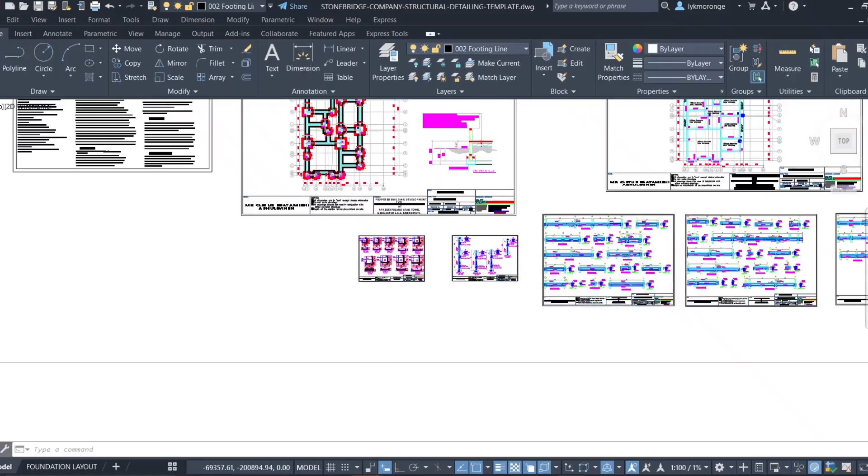Our aim is to edit these pad footings that we brought from ProtaStructure so that they look presentable. You can see how they look like - they are very confused and have a lot of undefined details. So we want to do a good edit so that finally we have our end product as this.

So how do you do this? You first choose one of the columns, like this one. Let me pick this. So you can simply pick this. You can see this one's 1500 by 1500.

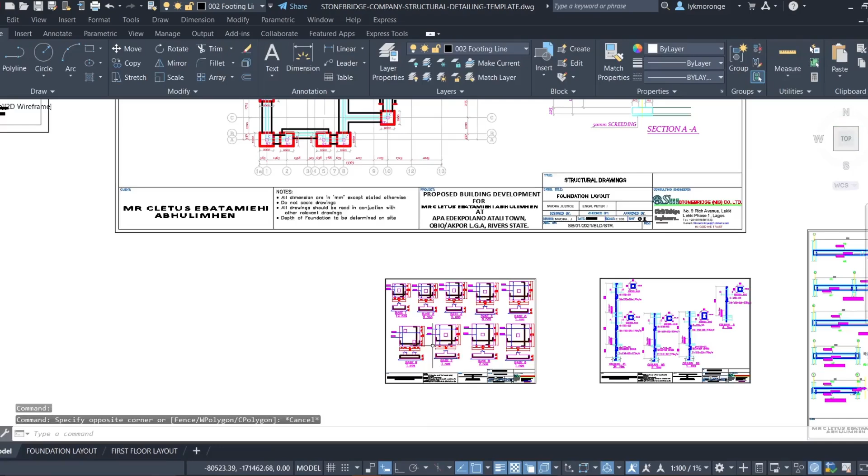Let's just look at what we have. Or alternatively, you can just copy it closer. You can just copy this - copy selected because you want to leave the original here and just move it closer to where we have these pad footings.

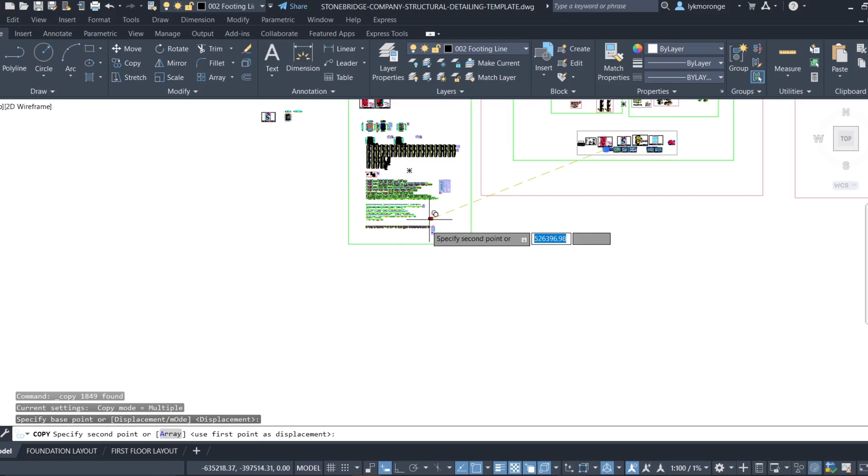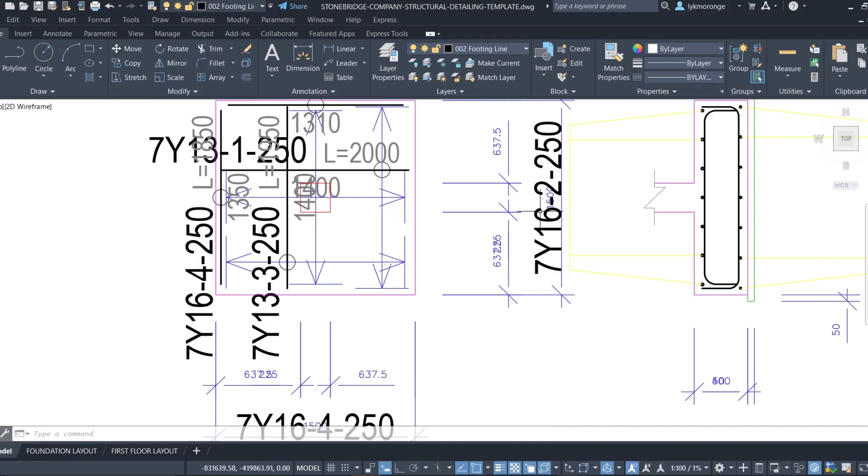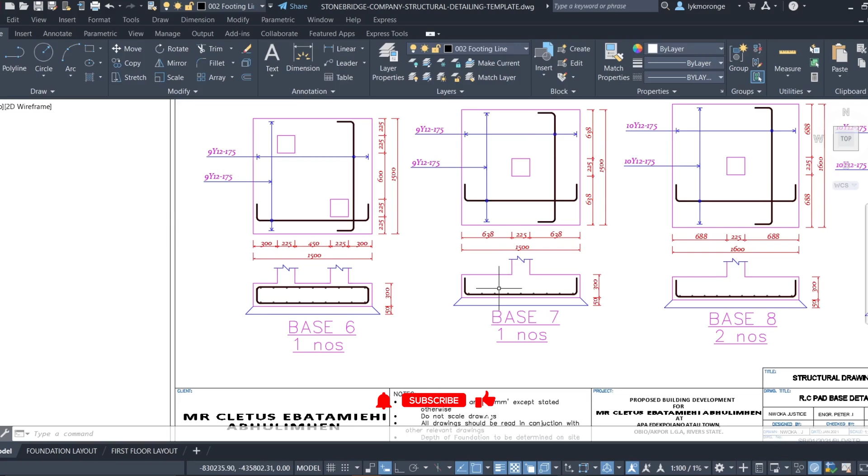So let me copy this one because this is 1500 by 1500, and it has the double reinforcement, but this one doesn't have the double reinforcement. Remember that I taught you why we need this. You can see these two - these are combined pad footings, that's why you can see it has some double reinforcement. Yes, I explained that, so you can just see how these details are up to date with some engineering concepts.

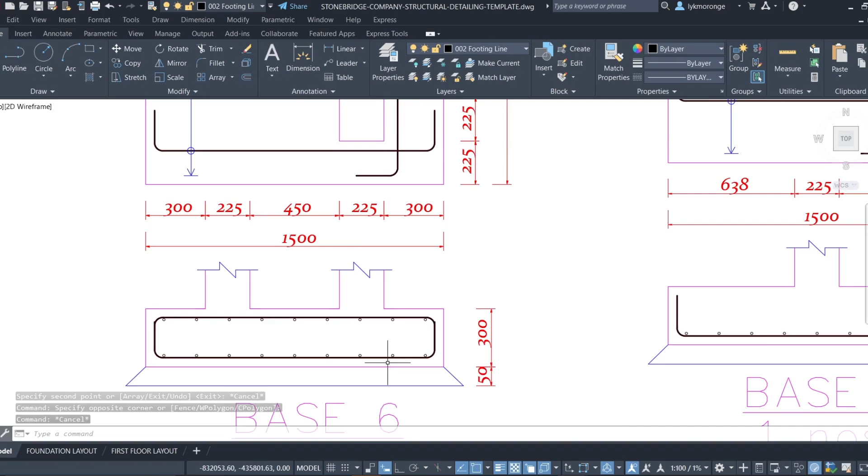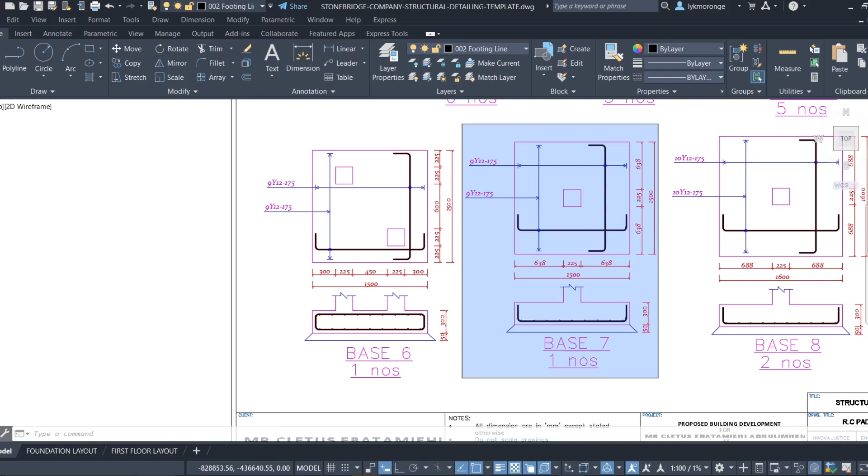So we know that what you have on our end there is not a double reinforced footing, so I'll just pick this one. Let me just copy this and ensure that I don't copy any other. I can just do a right click like this - right click, copy.

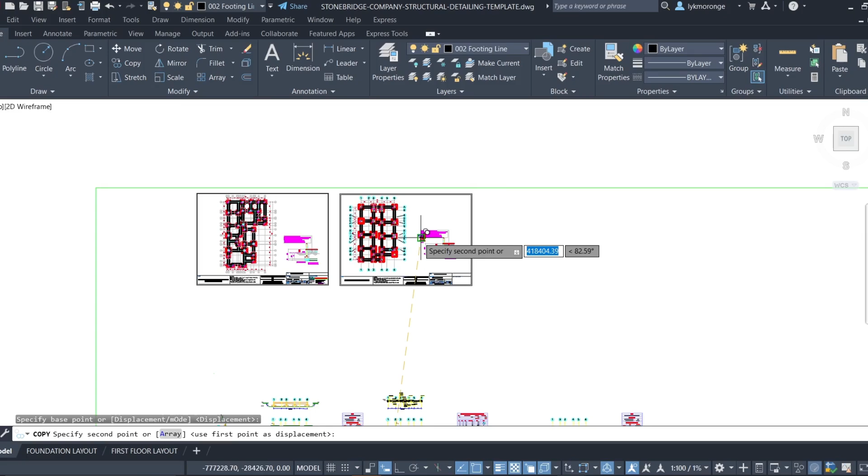So I can move it maybe to where I want to edit all my drawings, where I want to organize my drawing. Remember the other drawing that I was working on is here. So I can simply keep it here. Once I keep it there, you remember that we already finished with this one, so I can actually delete this here.

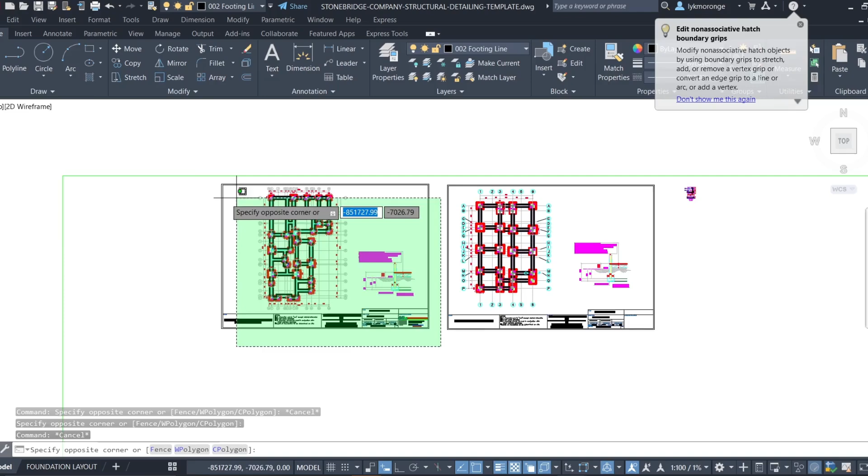Because that is what you are using to edit. Just undo, reselect it again, just delete.

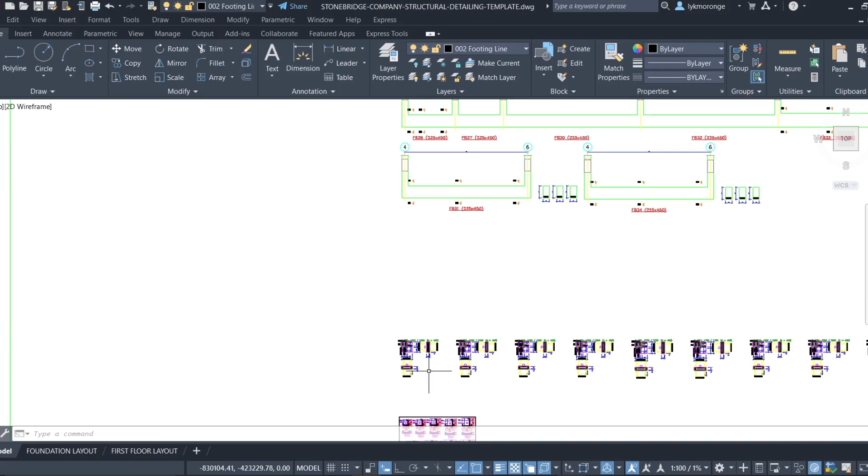And then you simply come and copy this pad footing. Remember, I taught you how you can group these pad footings - if you group them, there will be very few, so you're not going to edit all of these. You only sample - like you have the 1500, so you do those which are under the 1500 category, group them together. So let me pick this and take it closer to this.

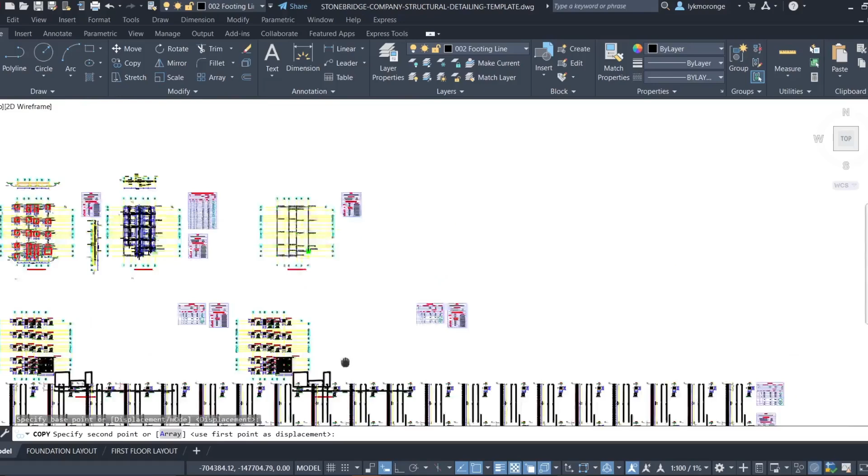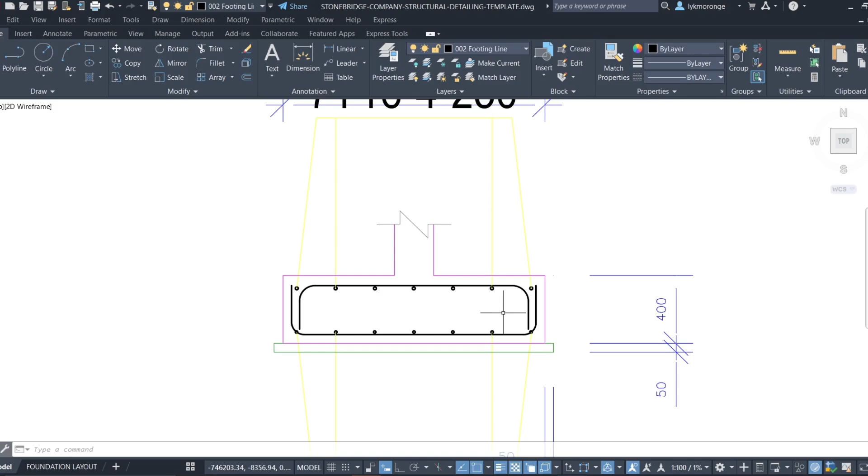So as you can see, there are a number of things that you want to delete that are not necessary. The first one you want to delete - for our case here, we will not need this top reinforcement, so you have to delete it here. And also these labels, we don't need these labels.

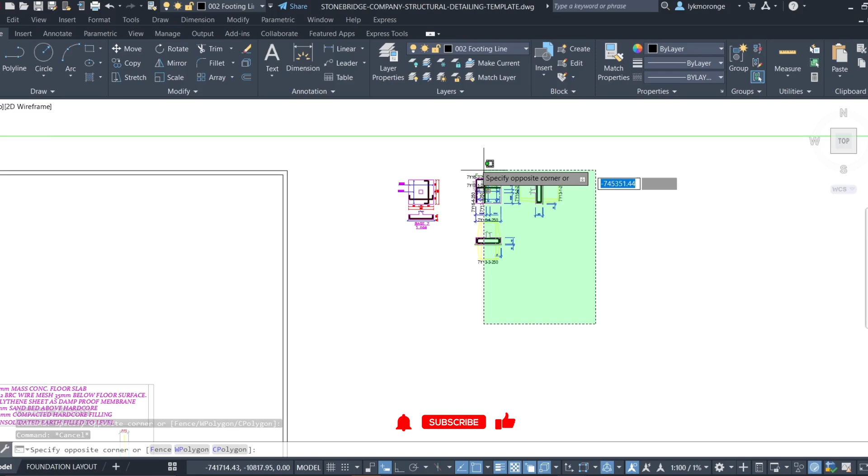So you can simply pick all these labels, we don't need them. And to make our work easier, you can simply select this, check the line that we have - this leader line as our layer. So just click here, just select the entirety of this. Once you select it entirely, just right click, do a quick select.

Once you do the quick select, select the layer type, and just come and get it - it is called the leader line. Then click OK and simply delete it.

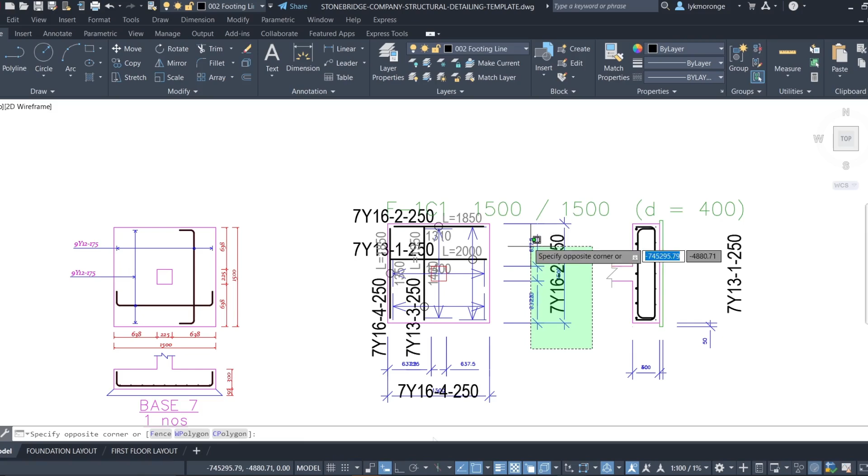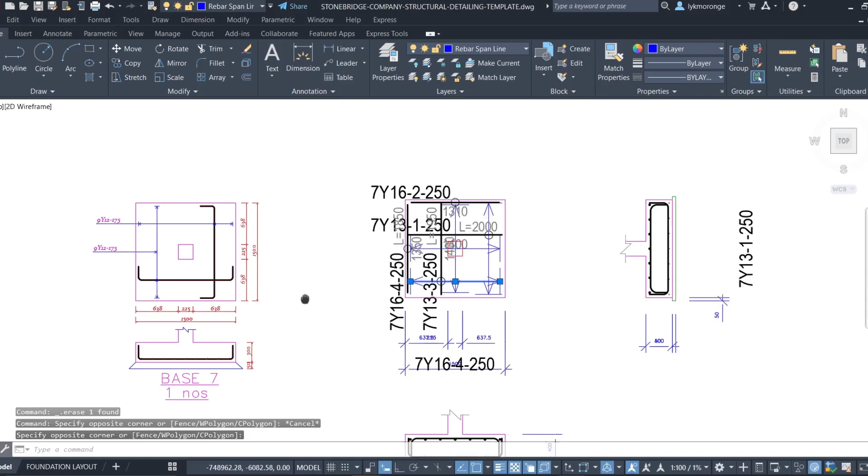Another thing that we don't need - you can simply select, we don't need all these. Or you can leave the reinforcements so that they can guide you before you actually arrive at whatever you have. So what we'll need here, you can see these arrows - we need these arrows as they are, these ones here. So how do you do that?

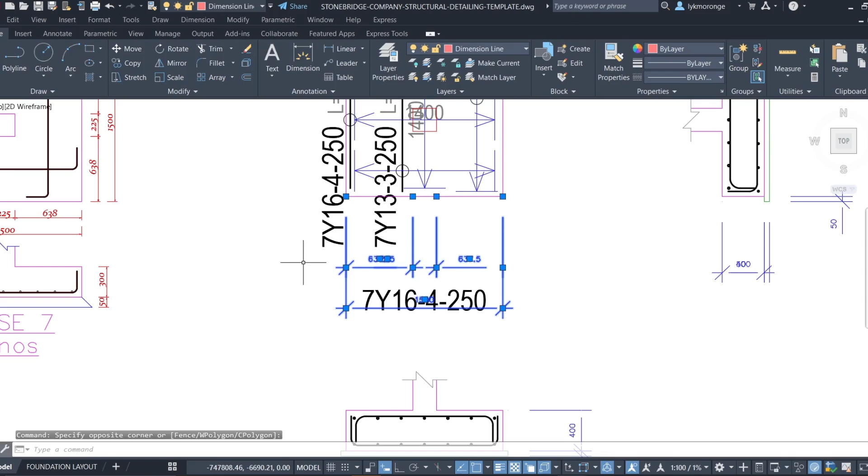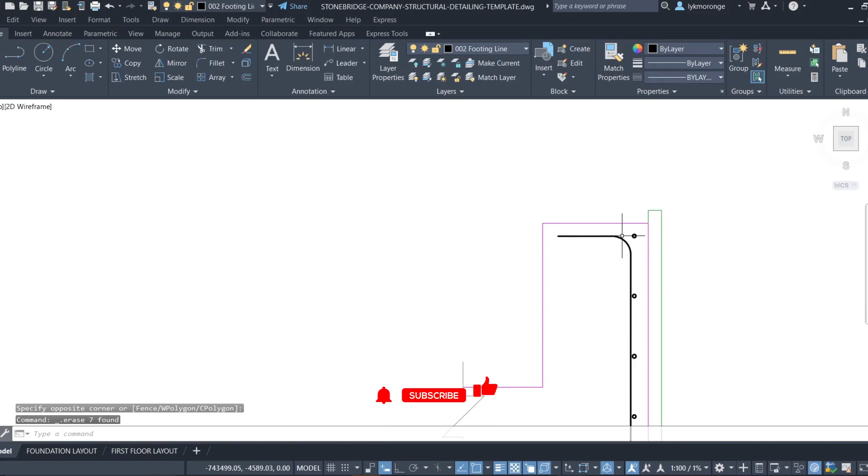So let's just first delete these labels, we don't need these. If you had edited this properly in ProtaStructure, then you will get pad footings without these top reinforcements. But because we didn't edit them at first, we now have to delete them because they are not necessary. Or we can simply leave that one. Let me undo.

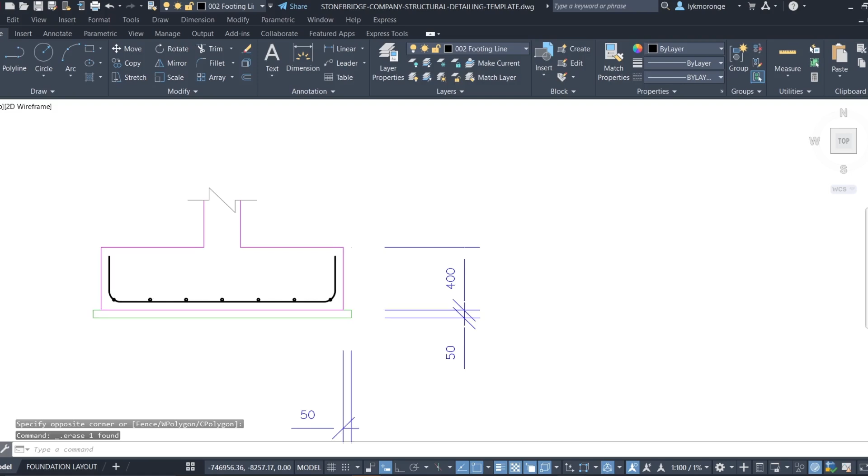Now you should be noting this down because you need this information. This is 7Y16 at a distance of 250. I can simply copy it, but they are down here below, you can see. You have that information below here because I want to delete it.

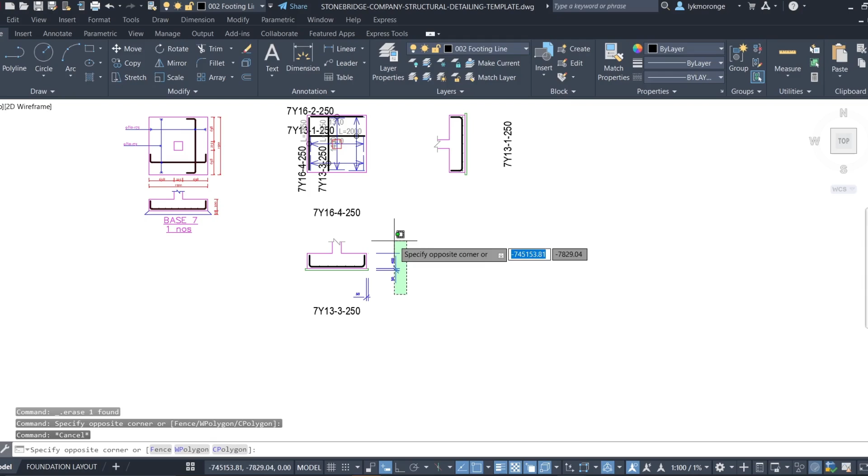This pad footing is 400. You can simply note that. The cover is 50.

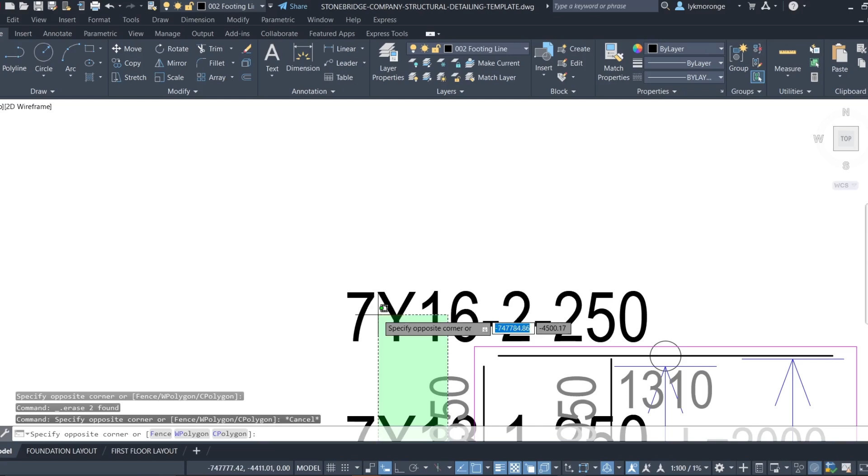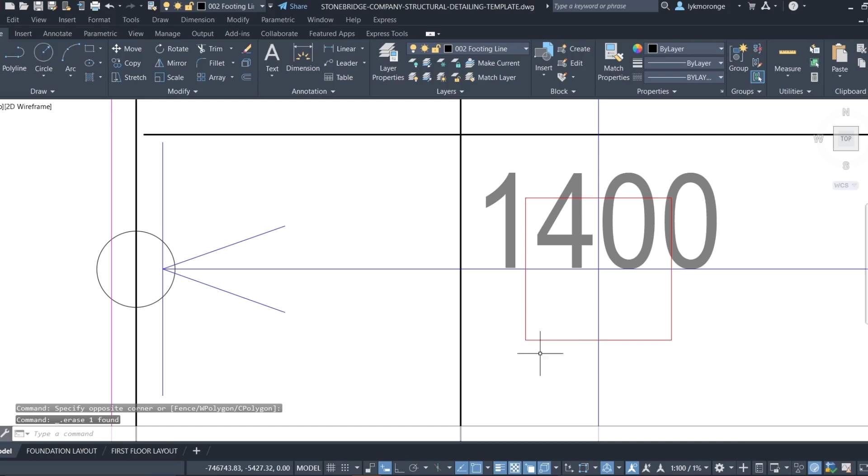Just do a clean-up of this. All these, we don't need them. But we'll need this column. Maybe you can simply leave this column here.

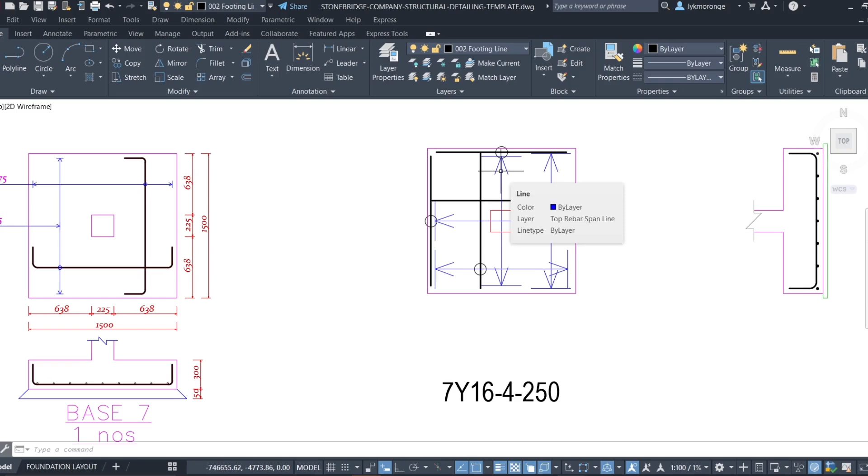So remember, we had the top and the bottom reinforcement. That's why you can see we have these two sets of bars here. But for our case, we can actually delete this. You can actually delete these rebars here, and you can also delete these rebars here.

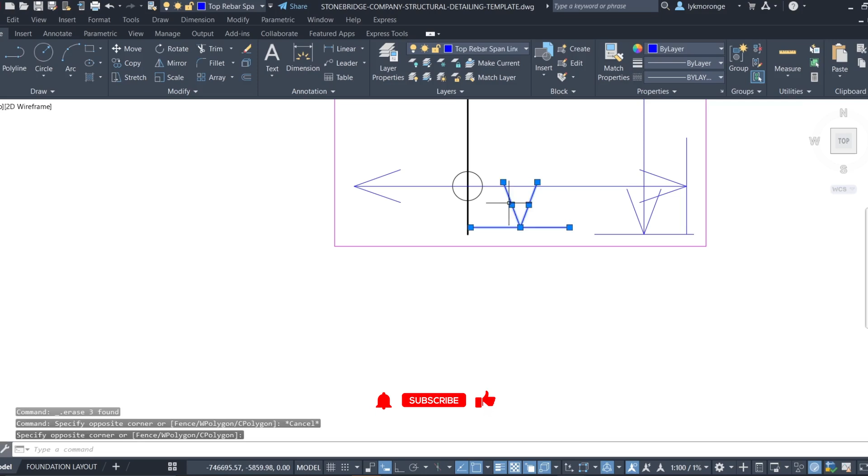So you can see, just follow through. I hope you are going to understand all what I'm doing. So we have this. So this is what is left.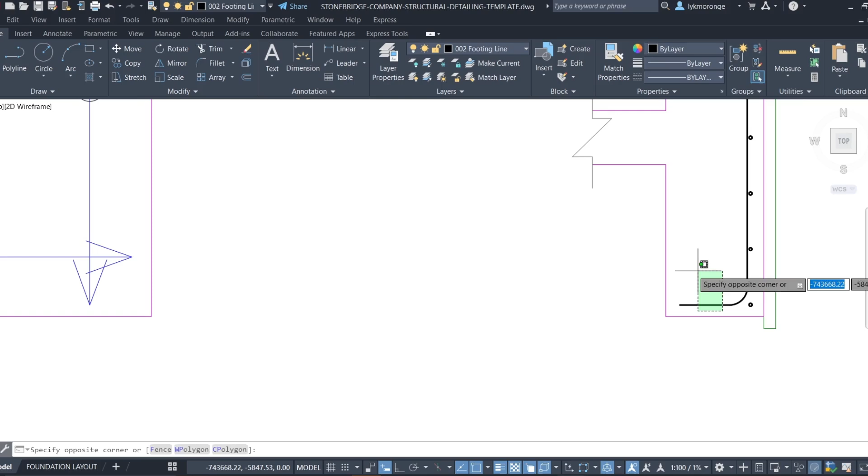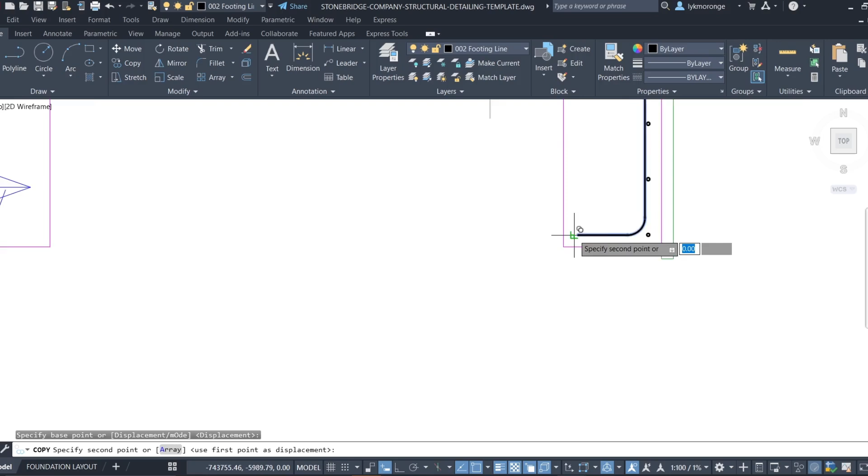So what we'll do, you come and copy this. You can see this bar is this bar here that we have. So simply come and copy it, right click, copy. Do a select somewhere wherever you want to copy it from, and then you can simply move it across to this part. Just put it along this line.

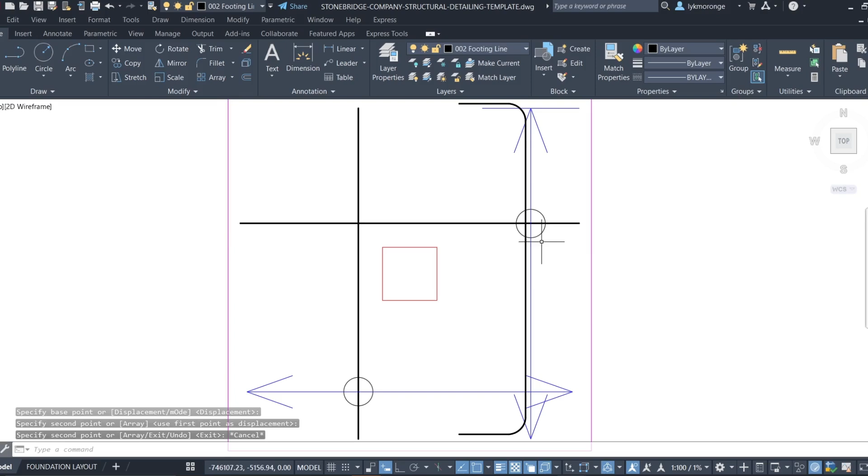I think this one will just be fine. Yeah, somewhere there. And now you can go ahead and delete. And now you also copy this one below here and bring it over.

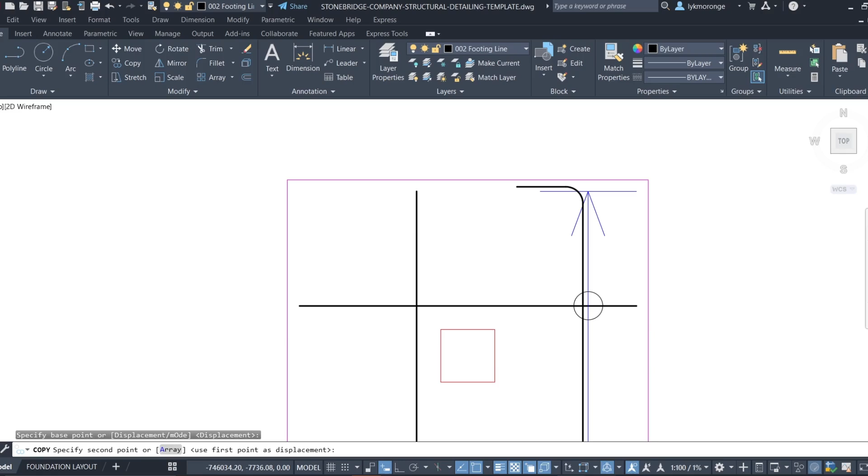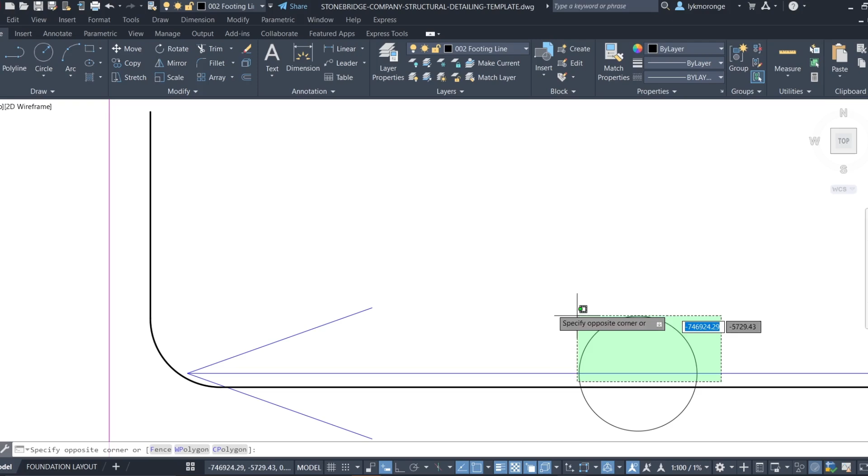So just bring it somewhere here. Once you do those, you can actually do this, and delete now these ones. You can see these bubbles are not very professional. You can simply do away with them.

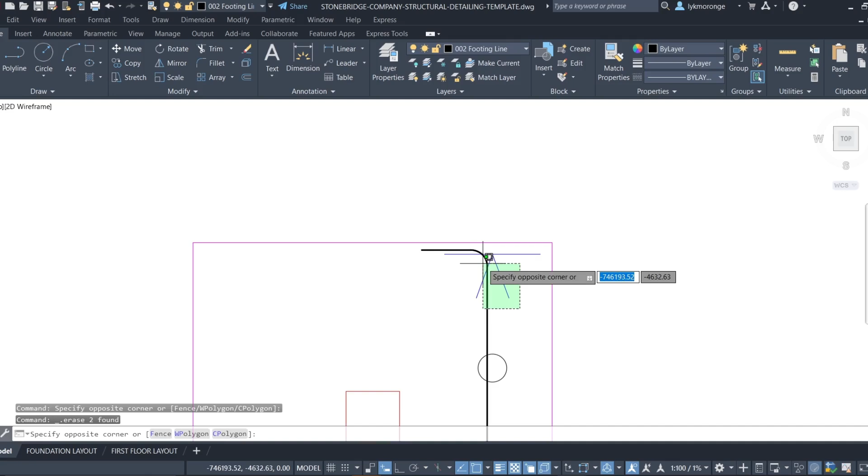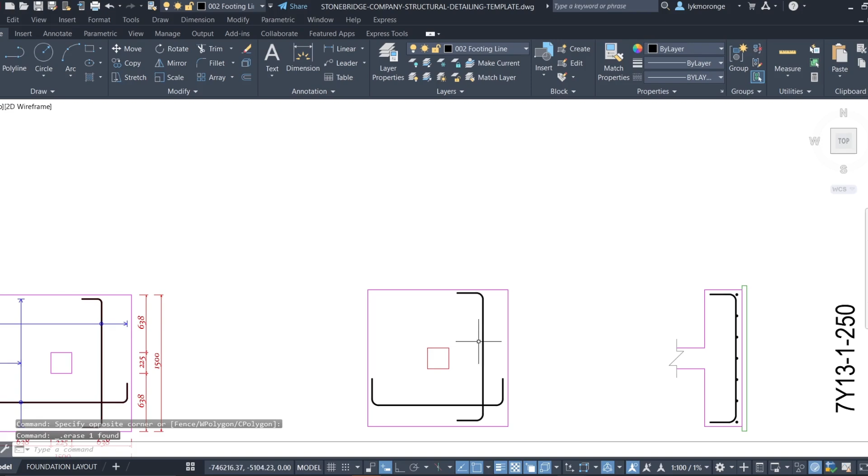Right click, just do this like a move. Or you can even delete this one because I want us to use the bubble from the other one. So you can see the only thing you have there that looks alike is these two icons.

So what you can do, you can actually do your dimension. You'd also make sure that you delete this one because you are having a square footing, not a rectangular one.

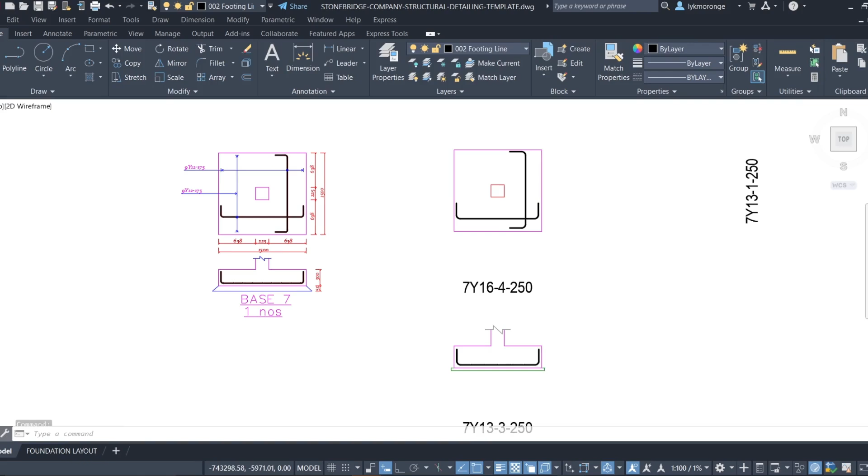You don't need to section it on both sides. This single section below here will just be sufficient, this one here. So maybe you can simply delete this and then copy this, move it closer to.

So right click, copy, and now move it closer.

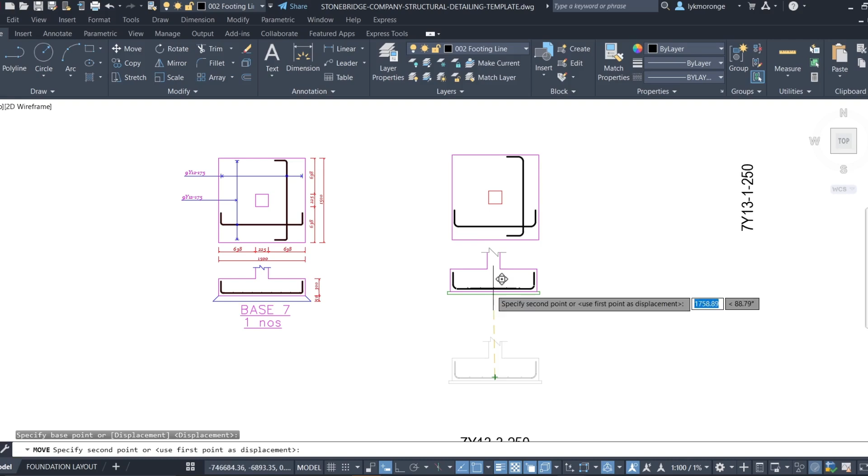So what we'll do, you can actually come. You can see now you want to tell the people on site that this rebar is moving from the entire of this side up to this end here.

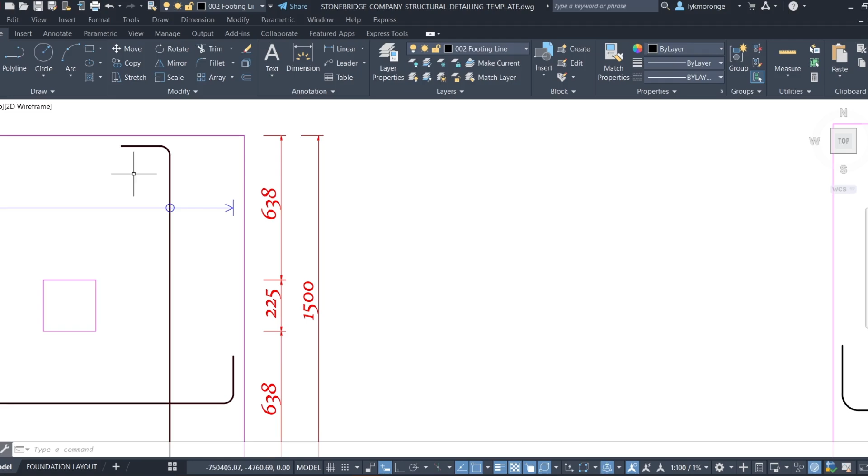So you can copy this bubble together with this. You just right click, copy. You can just pick it from here.

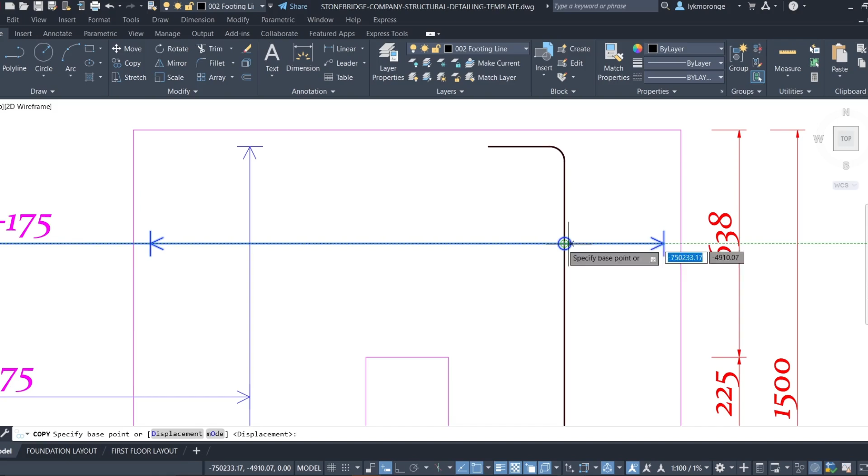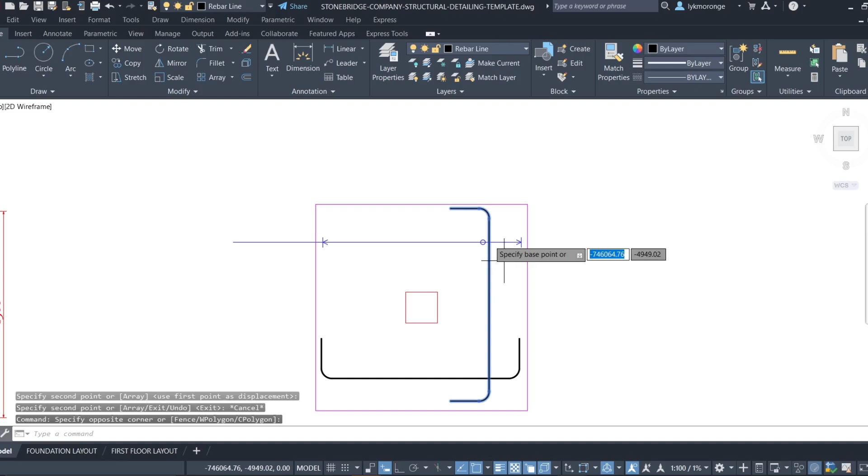Yes, you can simply put it there. Make sure that it is at the center of this circle here so that you communicate properly.

Oh, I just forgot to copy the... copy.

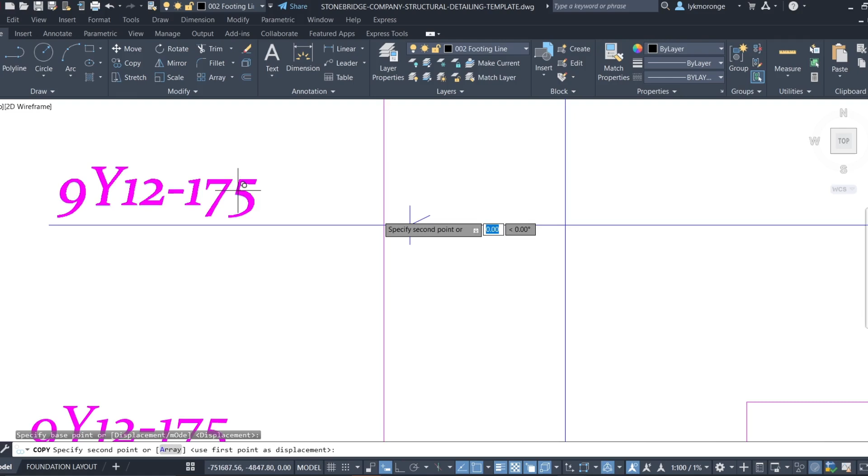So that's what we have for this rebar. I think that one we are done with. So let's come to the one that is on top here.

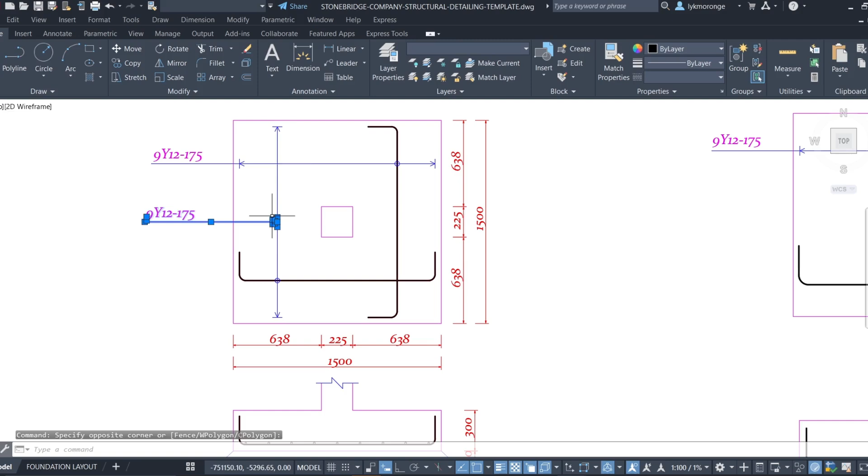Just come and select it. Select this one as well. Yes, hello. Select this.

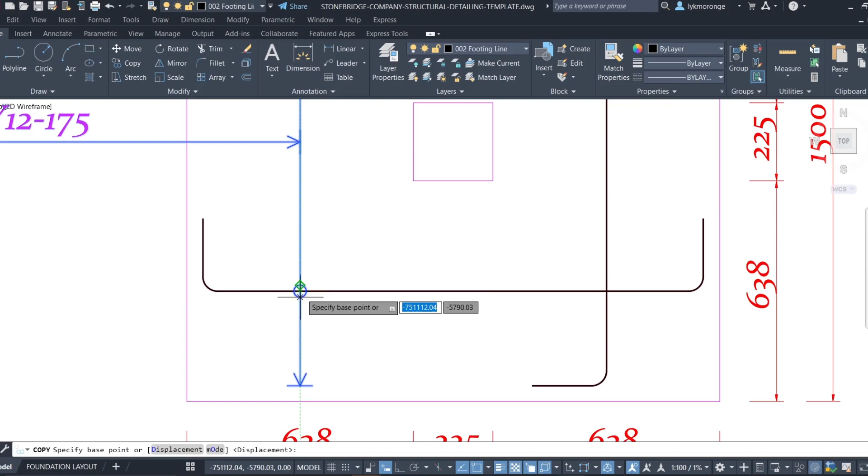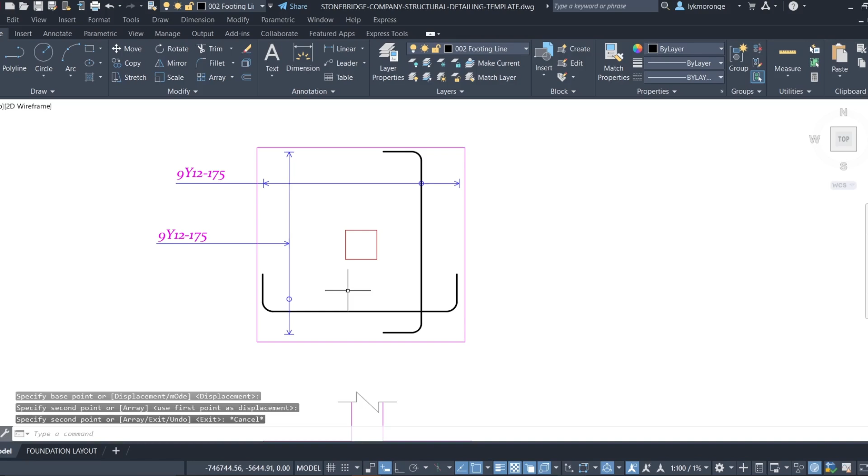So also this one, simply come and check over so that it fits well. So you can simply leave it there and then pick this, or you can simply move this down, this bubble, right click.

Right click, copy at the center. Not that you ought to even have moved it, just leave it at that place.

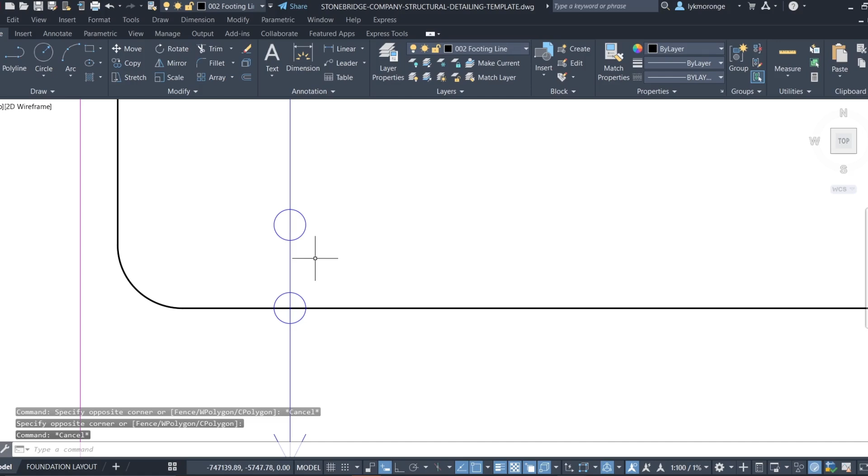So that's what now we have for our dimension. So the first thing that you'll do, you have to edit this rebar. And if you check from what we had, I think this one we had 13.

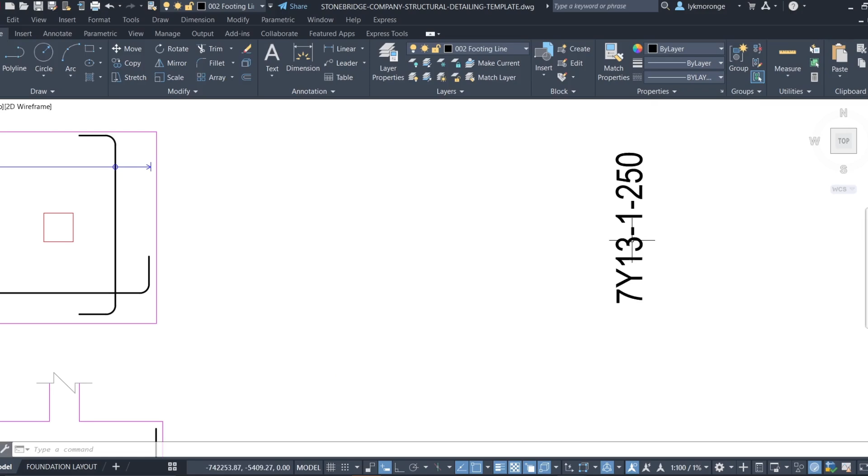You see, you used the wrong rebar. This was a mistake here. You cannot use Y13. Maybe is it available in your country? So you need to understand how to do material selection so that you select the right rebar. So for this one, you can just give it maybe the 16.

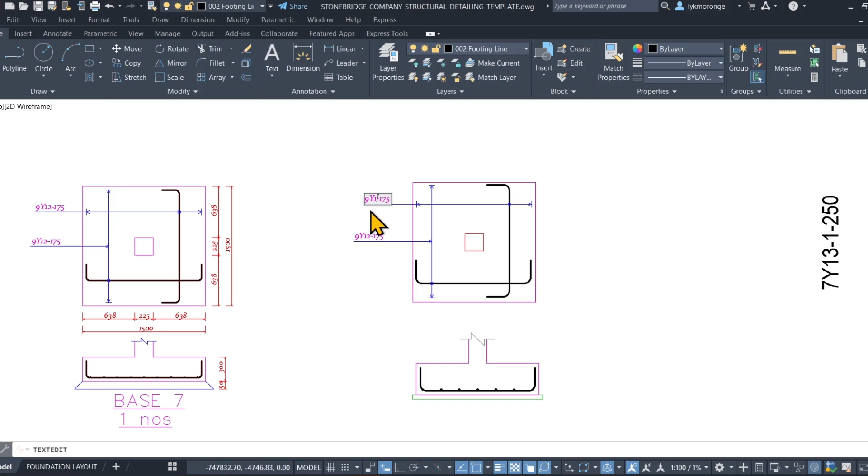So for the number, it's okay, but for the bar size is not okay. So here we have 7. You can let me just give it. This one can be the 16, not the 13, and this one should be 7 in number. And also this one should be the 16, and they should be 7 in number.

Let's say you are using a spacing of maybe 200, not 175, just use 200, which is easier to work with on site. So also this one, you just ensure that this is 200.

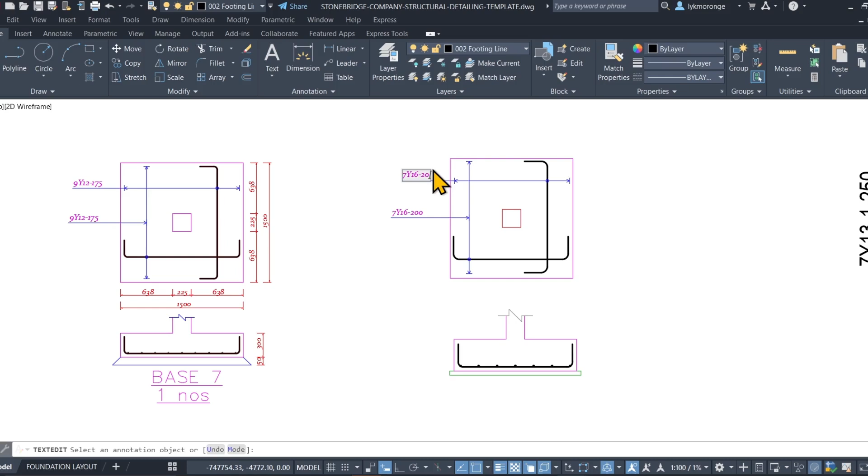So you have actually now updated your bar. So what is left out is just to add these dimensions. To add your dimension, you simply click on this. You click on this, put the ortho mode on.

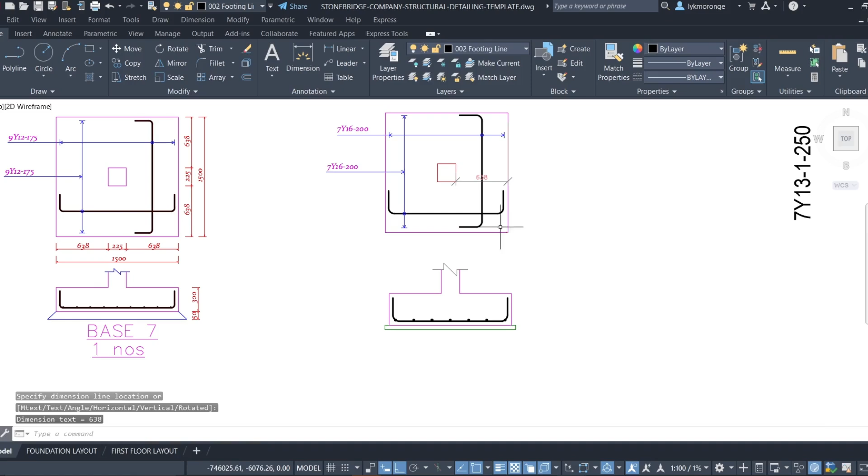Let me just do a proper dimensioning. Let's just do a linear dimension here. You can simply do like this. Come to annotate, continuous.

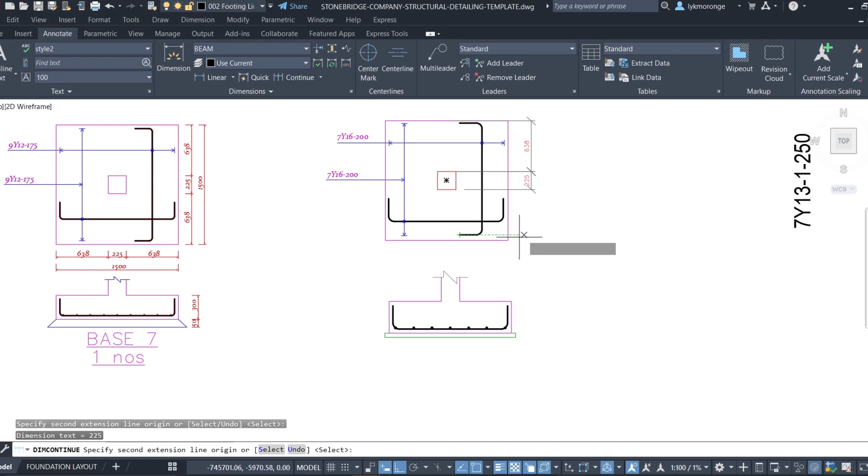So you can see what I'm dimensioning here. I'm just dimensioning the column size and this part here. So I can now get my dimension, linear dimension. Just click now again from here up to this corner here.

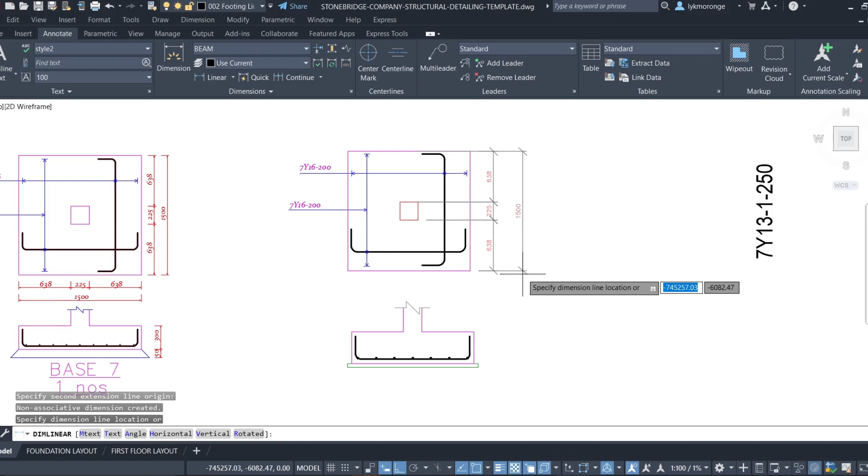And now you just bring it outside at a safer distance. Then just click again on your dimension. You can just come and click on this, come and touch on that, bring it outside, then come click on continue, touch on that, and also touch on this.

Sorry, just click on this. Then get your linear dimension. Get your linear dimension. Just click on this. Come up to the last part here.

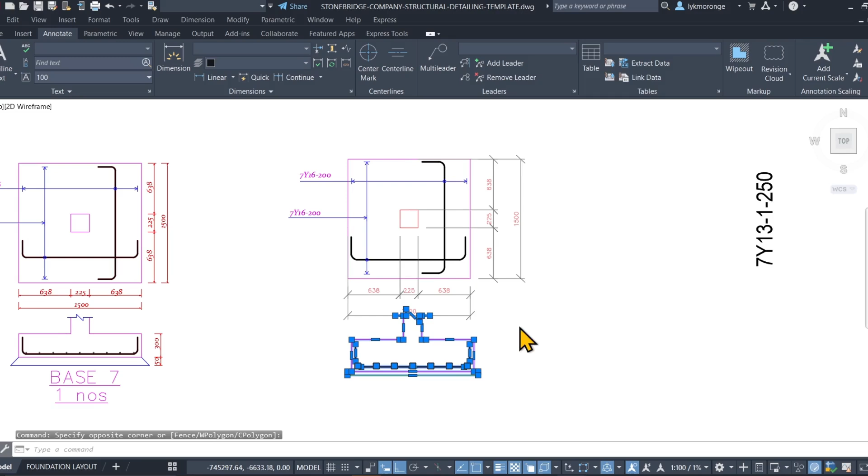Bring it outside here at a safer distance, and then maybe you can just decide to select this. Right click, move it just below a bit.

Yes, then get this dimension, this part here. This is the pad footing, the curve, I mean the cover. Then just come click on continue. Now just come and dimension this part here.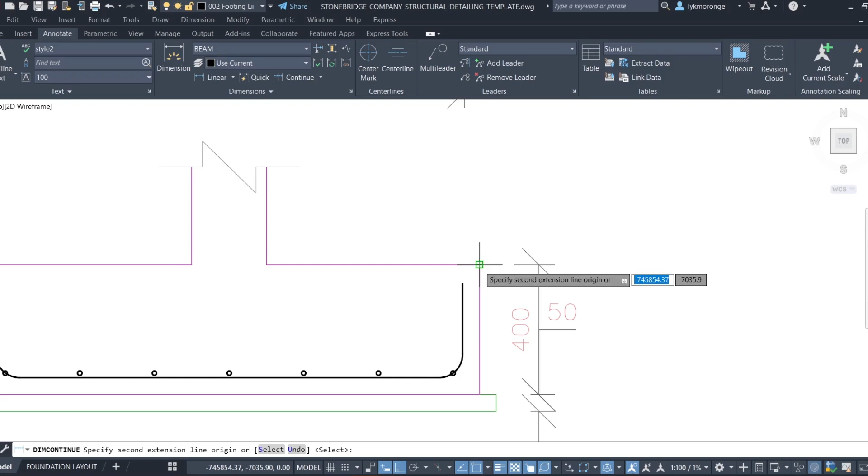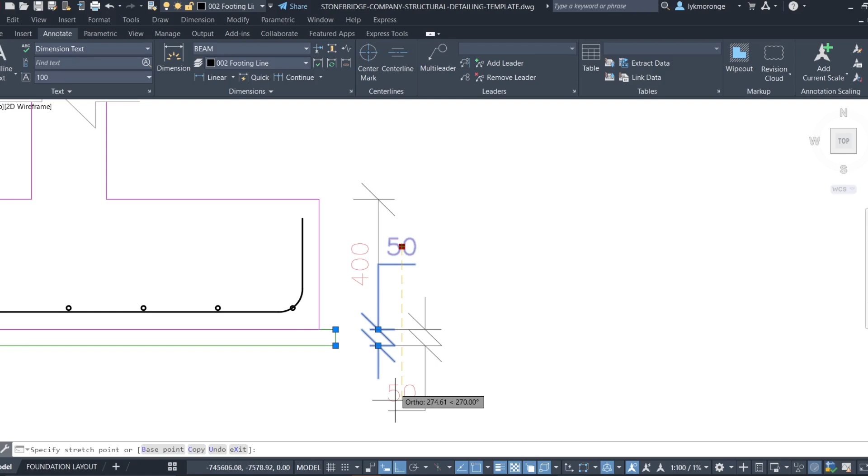Just enter. If this 50 is just behaving like this, just right click, select this rebar, and then you can simply catch here and just move it down. Just undo this ortho mode, and then you can simply move it somewhere there, which will just be fine.

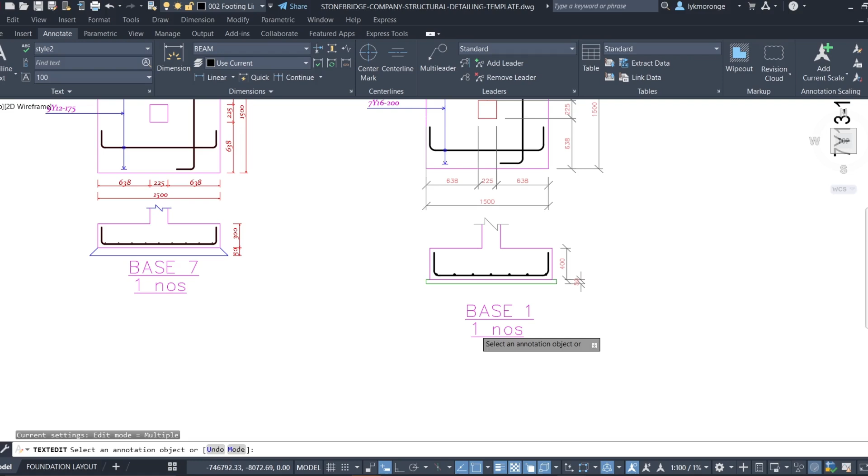So what are we left with? You can now just copy this, copy, bring it below here, and now label this. Maybe this base 1, based on how you group your bases. So you can simply write this one as B1, and then you give the number. Maybe if base 1 has several numbers, like let's say there are 5 in number, just give them 5.

There are 7, give them 7. Let me write even 9. There are 9 in number. We want to assume that. So you can see now we are arriving at a very similar detailed pad footing, like what we actually have here professionally done.

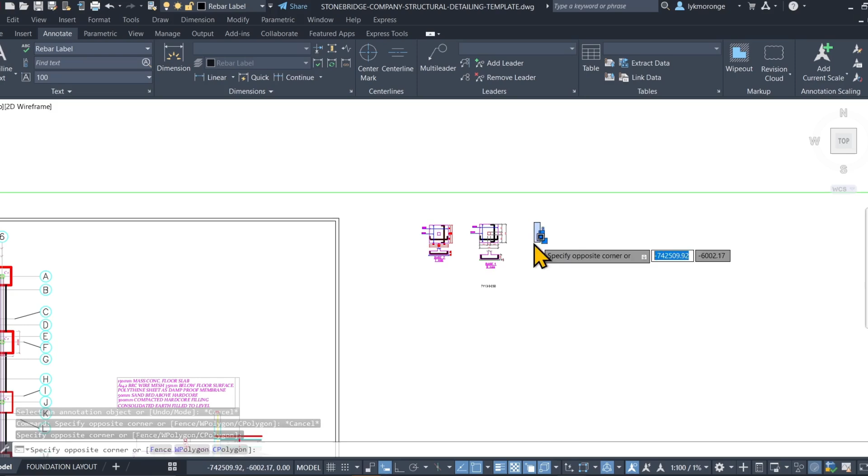So we delete that. So the only thing that you need to do, we just come to home and then we just match properties. Match properties for this dimension, like click on this, and now just come and also click on this.

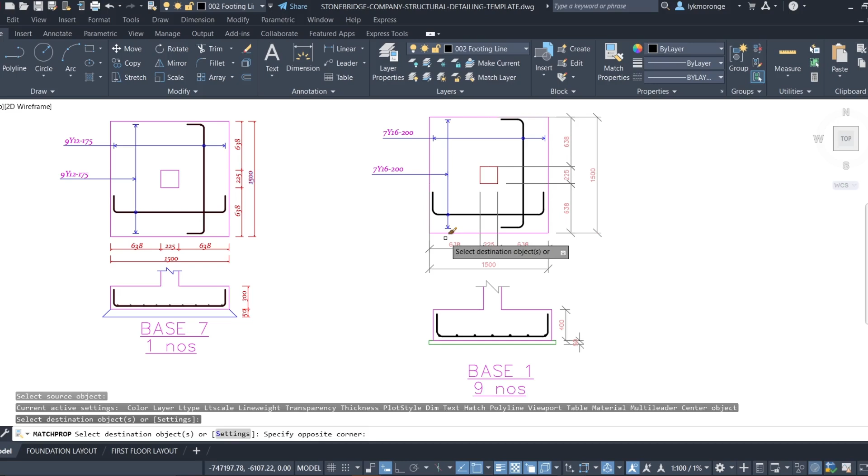So that we make our dimensions visible, just click on this. I can see this one is not working well, so just click on this match property. Let's find another dimensions that are more visible. Maybe we can click on this.

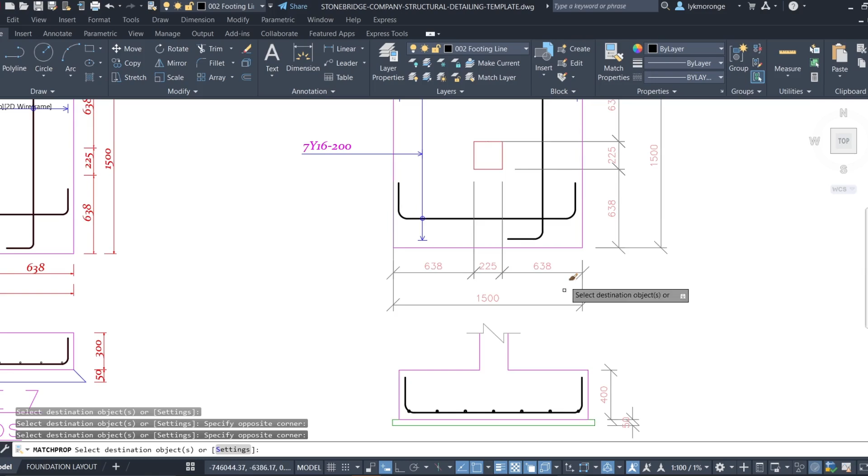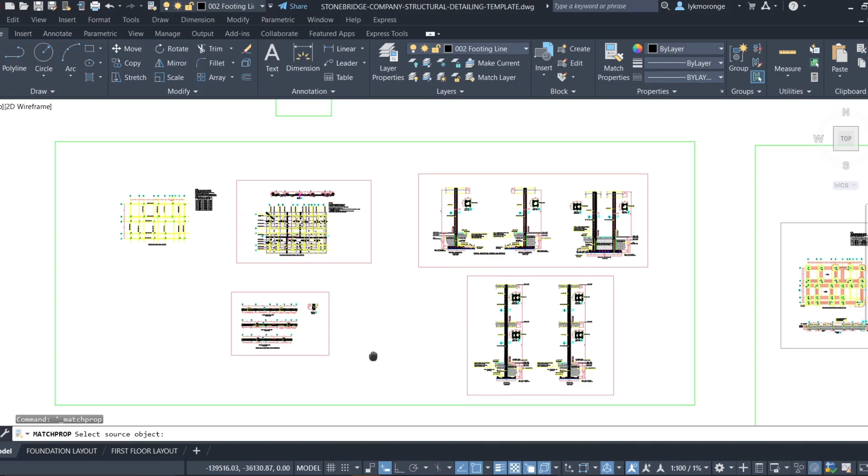So let me find another dimension somewhere which I can match with. Yes, let me click on that dimension and then I just come it over to my footing.

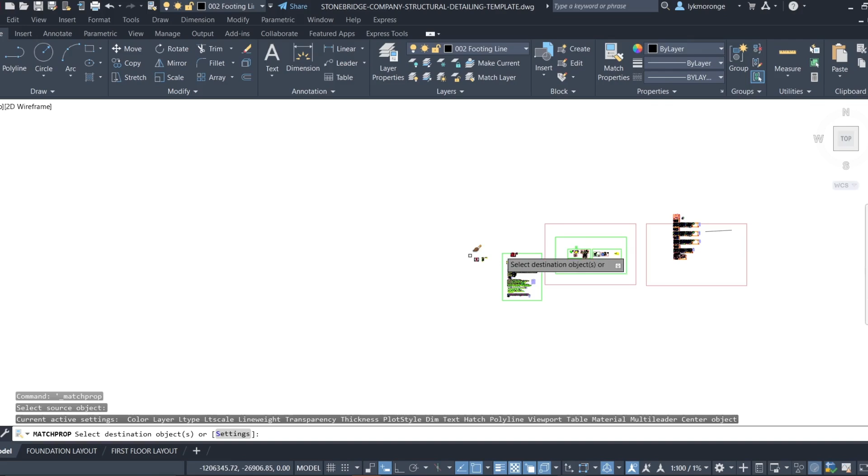This is again too large. Again, this is too large type of footing, but you can try find a way of making them visible. But I think they are not badly off even with this. So maybe we can just try to print this. We see how it looks like.

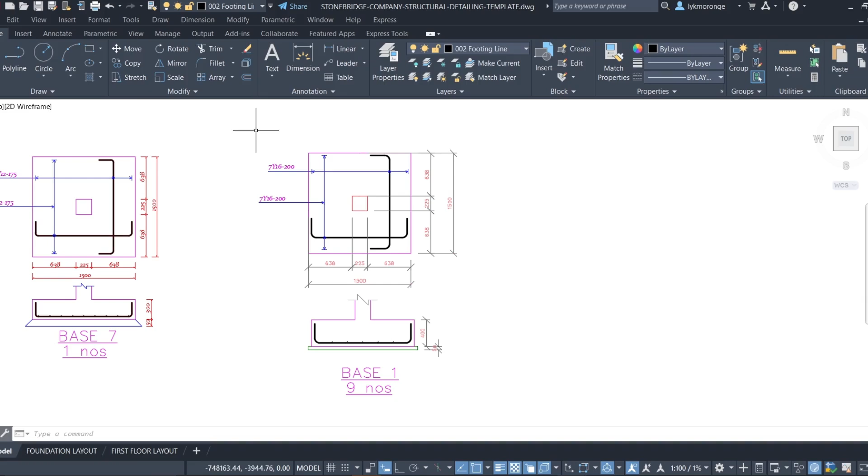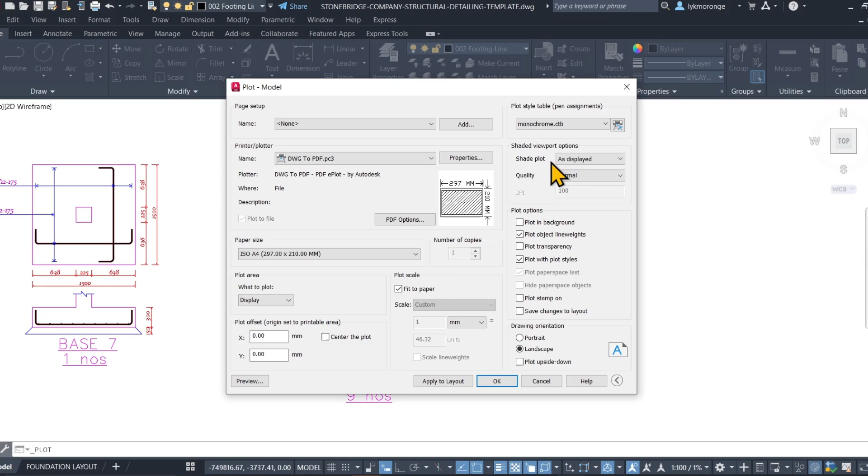So if you just come to, you can simply get DWG to PDF, and then let's change it to A4. Maybe A4 is just fine. And then want to give it monochrome. Instead of display, do a window.

Then you can simply do this. You see how it will, but to understand how it will actually appear, that one will give us, it's like we have just zoomed it out.

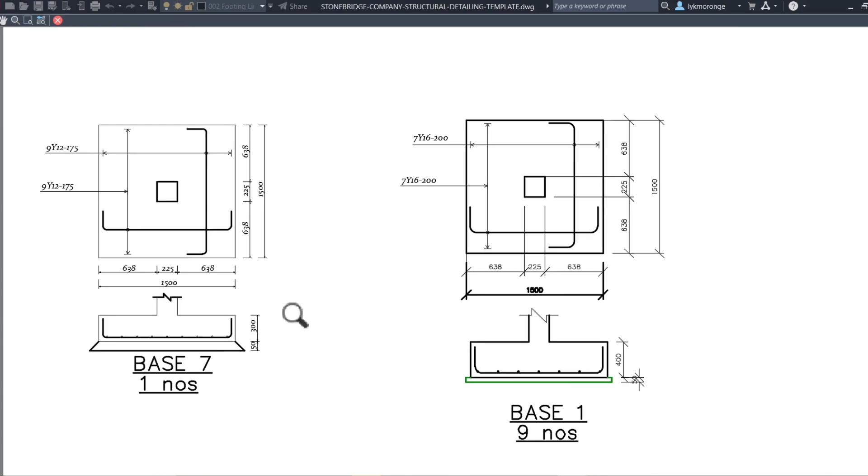Yes, you can see this dimension and this one are not very bad. You can just work with this one on site. Yes, you can see what we have here and what we actually have on our site. They are more or less the same. So that is how we do that pad footing. So maybe I can simply screenshot and share it.